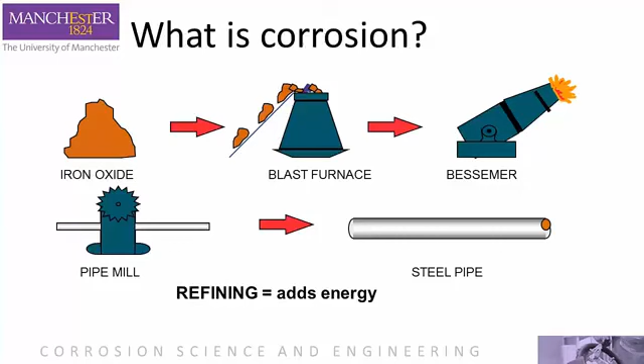So in the previous slide, we take iron oxide, shove it through the blast furnace, turn it into steel, run it through a pipe mill and create a steel pipe. Then we bury it in the ground. Once we bury it, the ground tries its best to return it back to iron oxide again.

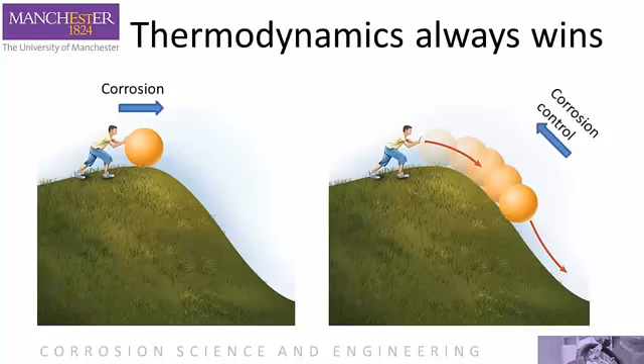Adding energy to iron ore to make it into steel is similar to rolling a ball up a hill. You're inputting energy and increasing its energy state, in this case, increasing its potential energy. However, left to its own, the ball will always try and roll back down the hill so as to minimize this gravitational potential energy. That's why you don't see balls rolling up hills on their own very often. So, corrosion is a process of returning a metal to its lower energy state, or the ball rolling down the hill. On the other hand, corrosion control requires energy to stop or slow the ball from rolling down the hill.

In Greek mythology, Sisyphus was the king of the city of Corinth. He was a famous trickster and was punished for believing he was more clever than Zeus himself. His punishment was to be doomed to roll an immense boulder up a hill, only to watch it roll back down, and to repeat this action forever. A life of futility and hard labour. So, a good metaphor for corrosion control is the worst possible punishment that Zeus, the most powerful god in Greek mythology, could give someone who thought he was clever.

Another colloquially never-ending task was the painting of the Forth Rail Bridge. Once the painters got to one end, allegedly they went back to the beginning and started again. Actually, although a permanent painting crew was indeed employed on the bridge, they always focused on the most important and most corroded bits, as you would have hoped. More recently, the bridge was coated with a new paint system that should reduce the cost of maintenance and last for at least 20 years.

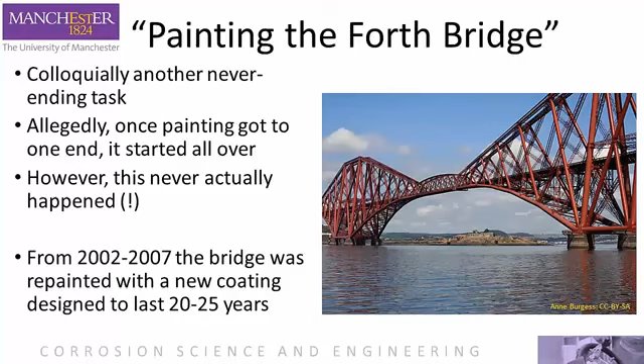So, why is corrosion control important? In a word, money. The cost of corrosion study funded by the US Congress was initiated by the US Corrosion Society, NACE, and completed in 2002. Corrosion Costs and Preventive Strategies in the United States estimated the annual cost at the time at around $250 billion. This amounted to around 3% of the total US gross domestic product. And similar figures have also been estimated for other major industrialized economies.

Metallic corrosion impacts nearly every industry sector. For example, bridges, gas, transportation pipelines, waterways and ports, airports, railroads, electrical communications, utilities, vehicles, ships, etc., etc.

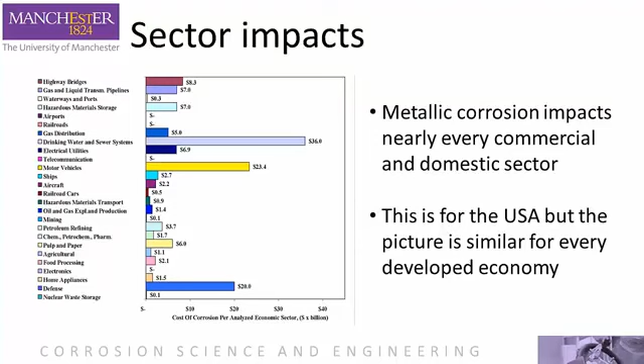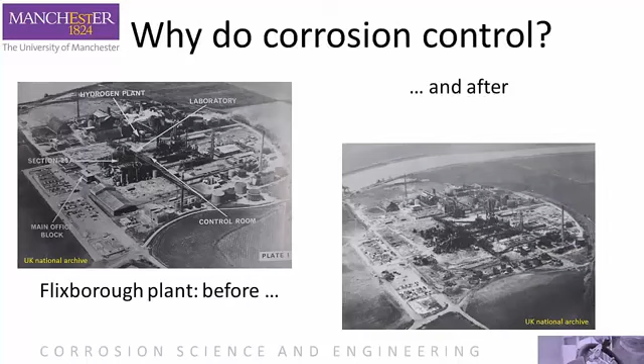So why else is corrosion control important? Public safety. In 1974, in the UK, a fractured pipe at a chemical plant in Flixborough released a cloud of flammable vapour that exploded with a force equivalent to 15 tons of TNT, the largest single explosion ever in the UK. 26 people lost their lives, 36 were injured, and 2,000 properties were damaged. Although there were many complex causes to this disaster, corrosion was implicated at an early stage.

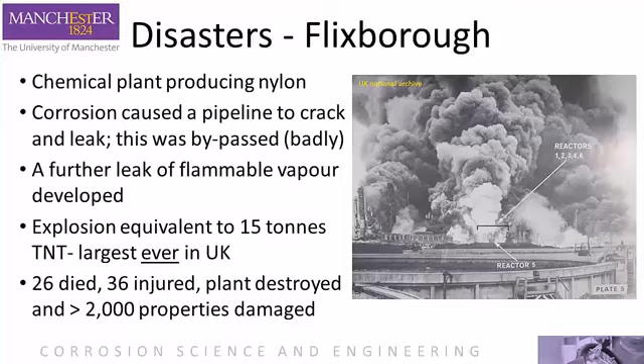In 2006, a quarter-inch, approximately 7mm leak in a 36-inch, 1-metre diameter pipeline at Prudhoe Bay in Alaska spilled around 5,000 barrels of oil, which is around 800,000 litres, over 2 acres, 8,000 square metres of land. The failure was caused by poor maintenance and inspection of the pipeline, which in the end had to be replaced.

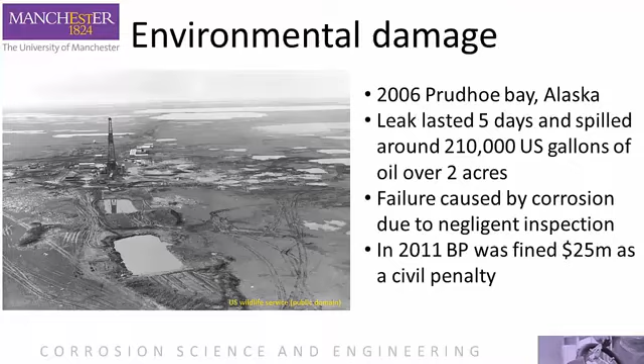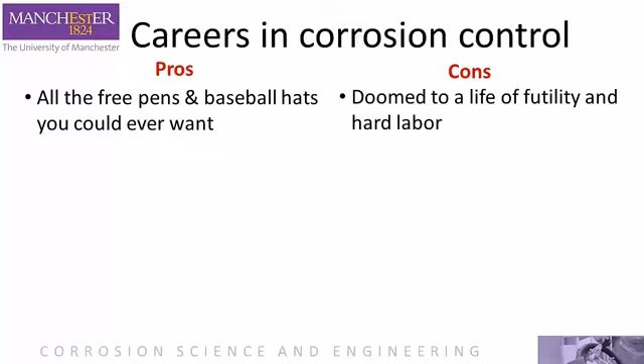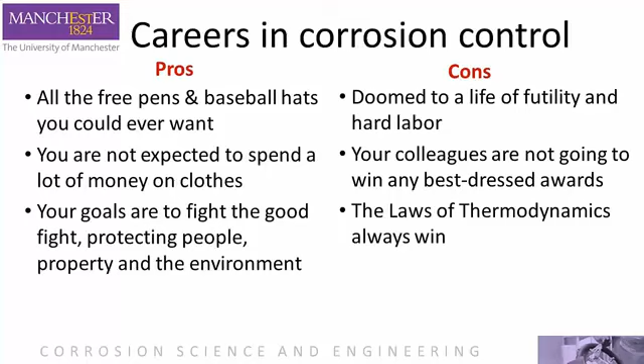Your goals are to fight the good fight, protect people, property and the environment. But the laws of thermodynamics always win. These goals are for the good of society in the long run, but in the long run, none of us are here.

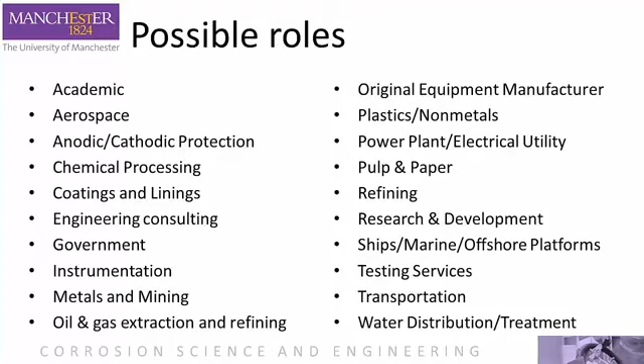There are many possible roles for corrosion control in almost every industry you can think of. Aerospace, plastics, pulp and paper, refining, R&D, consulting, academia, government, mining and oil and gas extraction, water distribution, etc. There are a few different career progression pathways, whether you are in the technical role or in the business management role.

If you're in a technical role, typically you'll be a single contributor as an expert. You would continue to develop your technical skills and experience throughout your career, and your degrees, certifications, licenses and other credentials will be very important.

On the other hand, if you're in the business role, your main role will be to manage people and/or projects, and the importance of specific technical skills would decrease throughout your career, although you would still need to have an awareness of corrosion. Credentials specifically relating to corrosion may not be required, and you might be working in networking, marketing, sales, recruitment, etc.

So why would you consider a career in corrosion control? Seriously, after all of this, why would you want to do that? Well, the answer is again, money. Every year, Materials Performance magazine conducts its annual Corrosion Career and Salary Survey of NACE International members in the United States, Canada and Europe. The blue line in this graph is the average US annual salary for corrosion professionals.

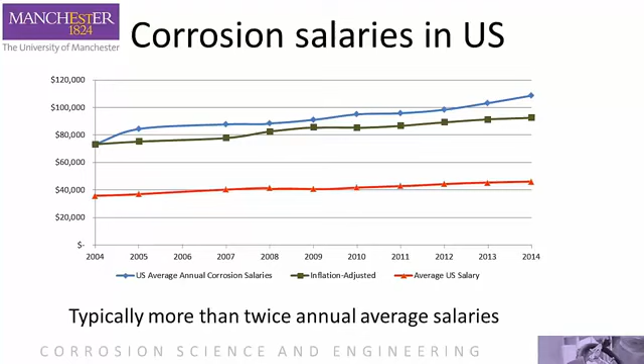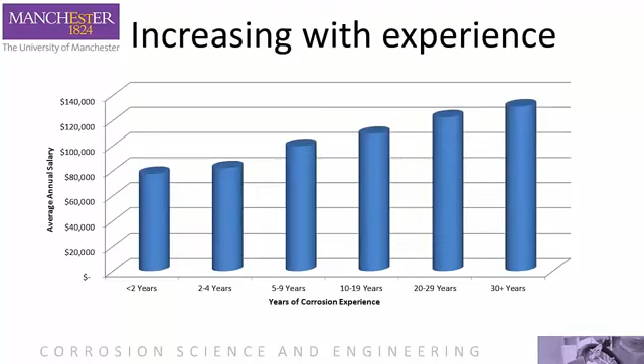The green line is the 2004 average salary adjusted for inflation, so you can see that corrosion professionals' salaries are beating inflation. The red line is the average US salary. Typically, you would earn more than twice annual average salaries. As you would expect, the average salary in the industry increases with experience in the field, and after 30 years you might expect to earn roughly twice what you would if you were entering the profession.

There are many opportunities for education in corrosion. The longest established graduate degree programme is at the University of Manchester in the UK, although other programmes are available. Professional training can also be undertaken by national corrosion societies, particularly the Institute of Corrosion in the UK, and by NACE International.